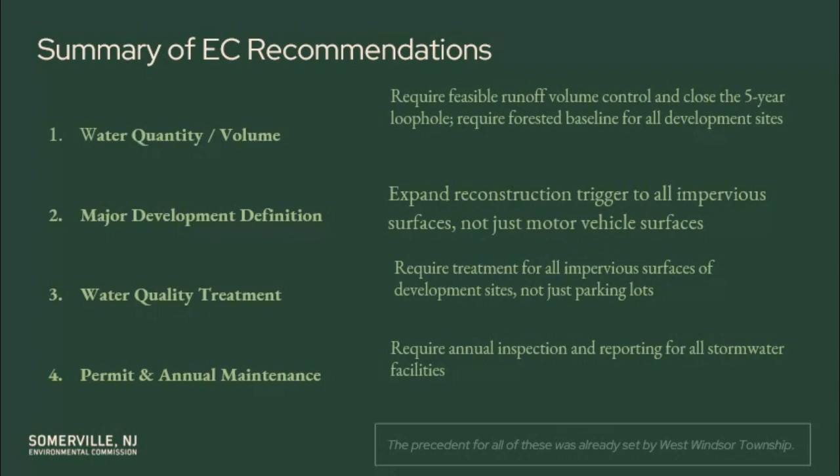So the first item I'm going to discuss is water quantity. And we will discuss the difference between water runoff rate versus water volume. The current ordinance that you are looking at, the current state minimums, I'm going to be referring to as the REAL Rules. And TWI is related to the Watershed Institute's enhancements, which we took our recommendations from. The REAL Rules, the current ordinance you're looking at, deals with rate but not volume, while the Watershed Institute's recommendations and our recommendations deal with both.

And that we make sure we baseline the peak runoff rate of water from a site as if the site were completely permeable. The REAL Rules does this, but only in conditions in which the site has been modified within the last 5 years. Most of our sites in Somerville that are going to be redeveloped have been sitting in the same condition, same hydrology for over 5 years.

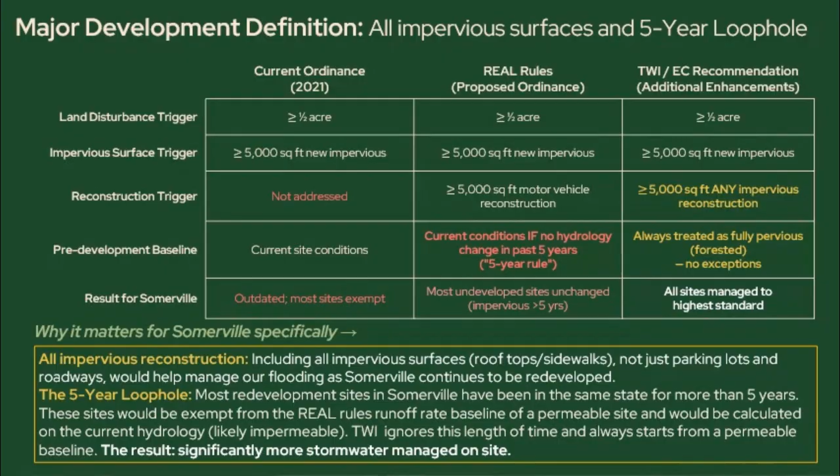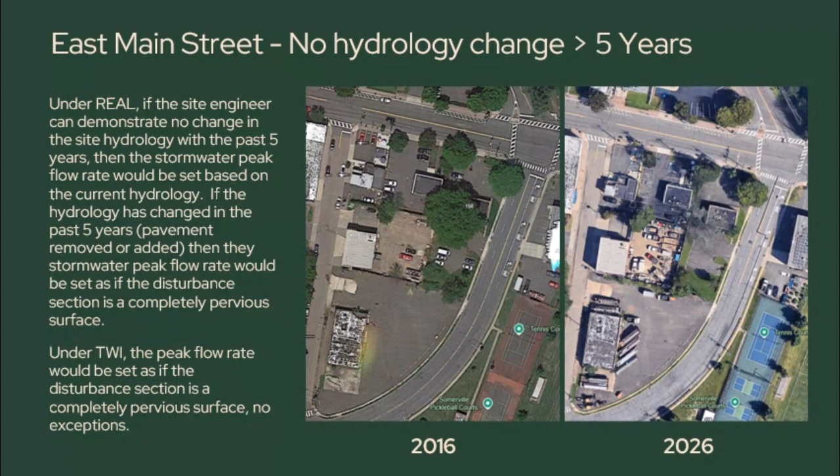Under the current ordinance, the peak rate would be baselined off of the current situation, since we're with a site that has no change over 5 years. So the peak rate for a 100-year storm would be set at 80% of the current hydrology. However, our recommendations would be baselined off of if the site was a permeable site. So the peak rate flow would be lower.

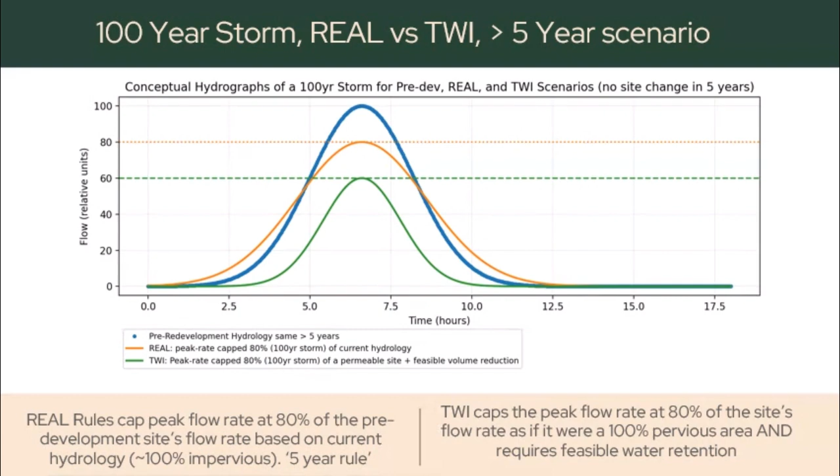Also, we're recommending that volume be controlled from the site. This would require feasible measures by the engineer to retain water on the site. As you can see, the shape of the orange graph is slightly different than the blue graph, even though the peak is less. And the green graph is lower and the shape is also different. So what does that mean for volume?

What this means is that the current site has a certain amount of water that comes off of it. Under the current ordinance you're looking at, with a site that has not been changed in 5 years, the same volume of water would come off that site. Under our recommendations, because we lower the peak rate and we address water retention and address water volume, the amount of water coming off of that site is going to be much less.

This means less water in our waterways. This means less water in our residents' basements and less water to destroy and harm our borough's infrastructure. This is how water volume can contribute, and peak flow rate doesn't necessarily deal with the overall problem.

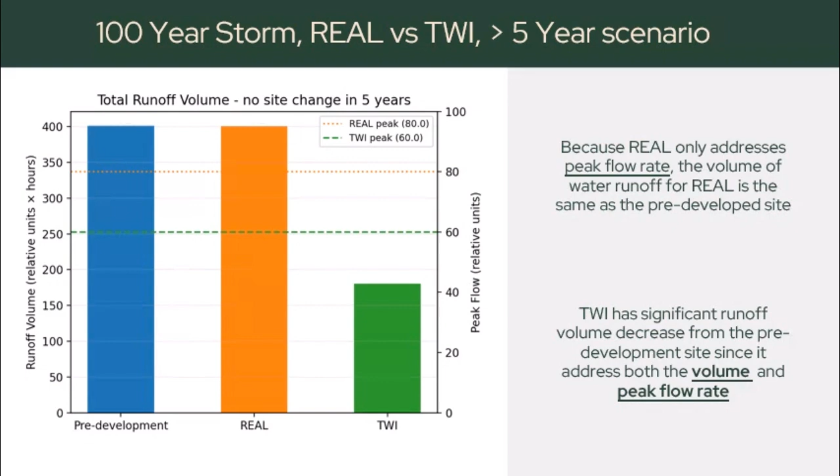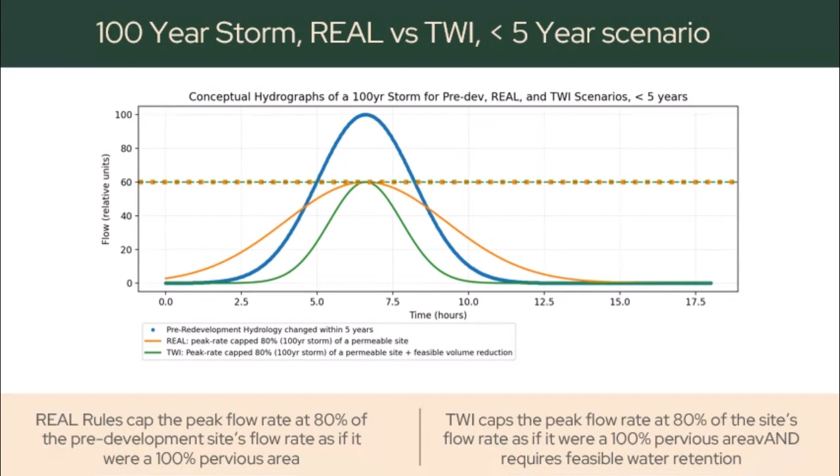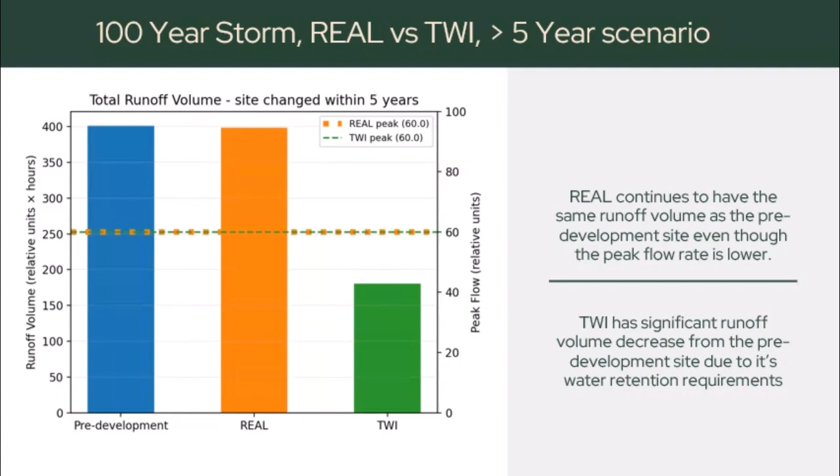So in conclusion, most sites in Somerville have not had their hydrology changed. The current ordinance you're looking at would make modest changes to the peak flow of the water, which would be a modest benefit to your current ordinance, but it is the state minimum.

Our recommendations ignore the timeline of the current site and also incorporate water retention to control the volume of water off that site. So what this results in is less water in our waterways, less water in our residents' basements, and less water to destroy and disrupt our town infrastructure and equipment.

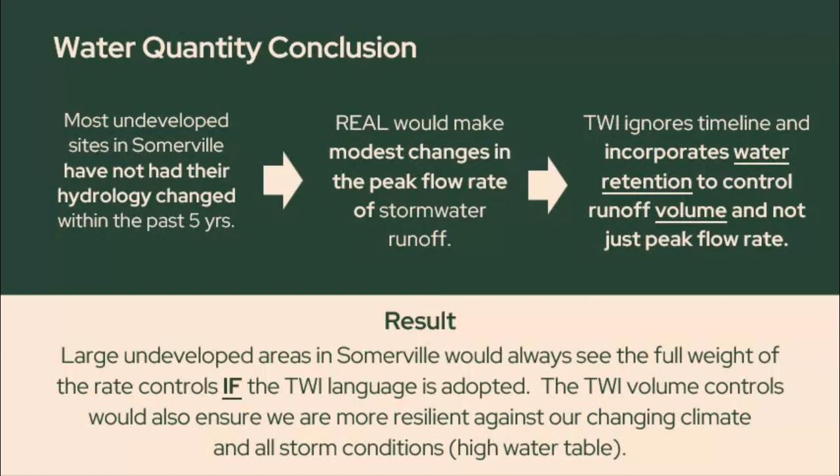So another way to explain this is I'll use a different analogy that maybe is helpful. Think about a bucket that has a specific size hole in the bottom, and you're having a storm. That bucket is filling up with water, and depending on the size of the hole, you're having a certain amount of water leaving that bucket at a certain rate. That size of the hole is going to change based on the current ordinance. It will be set to 80% of the pre-development site. So you're going to have a certain size hole.

All of that water is going to be moving off of an impermeable surface, if you consider the East Business District. And all of that water is going to eventually make it into our storm drains, into our stormwater management systems, and, like I said, into our rivers and streams. Even though it's flowing at a lower rate from the bucket than it would have been in the past, all of the water is going to get there.

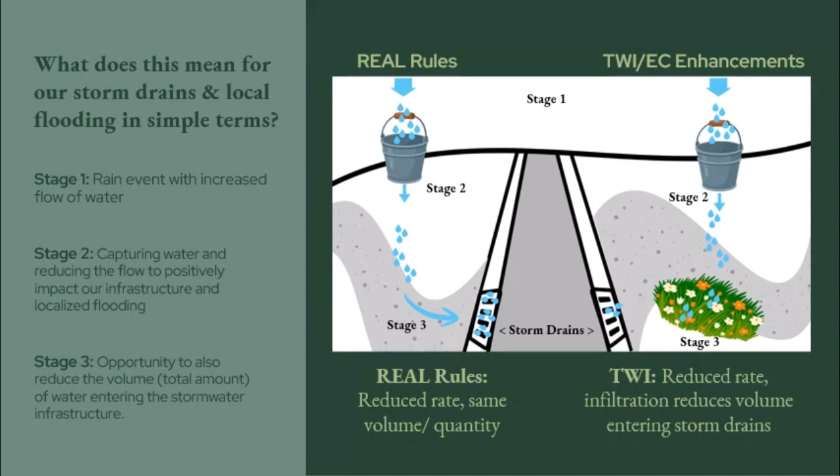If you consider our recommendations, the same size hole in the bucket, if you consider a scenario that's less than 5 years of disturbance, the same amount of water is leaving the bucket. However, you are retaining some of that water on site, and not as much water will reach our stormwater management systems, our storm drains, and our residents' basements and such. So I hope this analogy helps you understand that a little bit better.

The next recommendation we have is water quality. The REAL rules require a certain amount of suspended solids being removed or handled on motor vehicle ways, but other impervious surfaces are not addressed in the current ordinance you're looking at. Rooftops, plazas, loading areas, and sidewalks are not addressed. And I'd like to reiterate that most of the pollution that our waterways experience is from stormwater runoff.

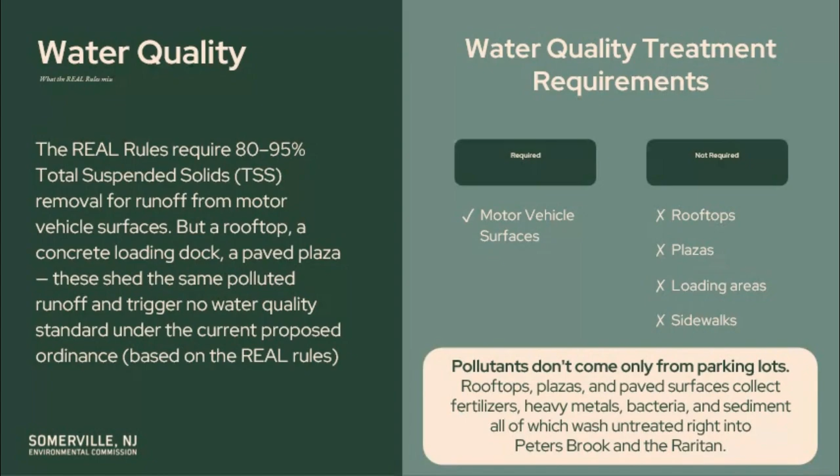So currently, every major development has a runoff gap. The rules require water quality treatment only for motor vehicle surfaces, parking lots, driveways, and roads, and none of these trigger any water quality standard no matter the size of the project.

So this runoff affects our infrastructure. Untreated rooftop and plaza runoff carries sediment, debris, and pollutants directly into Somerville's catch basins and storm drains, the same infrastructure that's already overwhelmed when it rains. The developer builds and then leaves. The borough maintains the system that receives everything they didn't treat. And so we close that gap.

The enhancements we're recommending would require water quality treatment for all impervious surfaces, no matter the project, and with no new thresholds. Just a requirement that a developer is already designing stormwater management into the site. Every hard surface gets treated, not just the parking lot. And you can look at West Windsor Township to get a better idea of how this might be implemented.

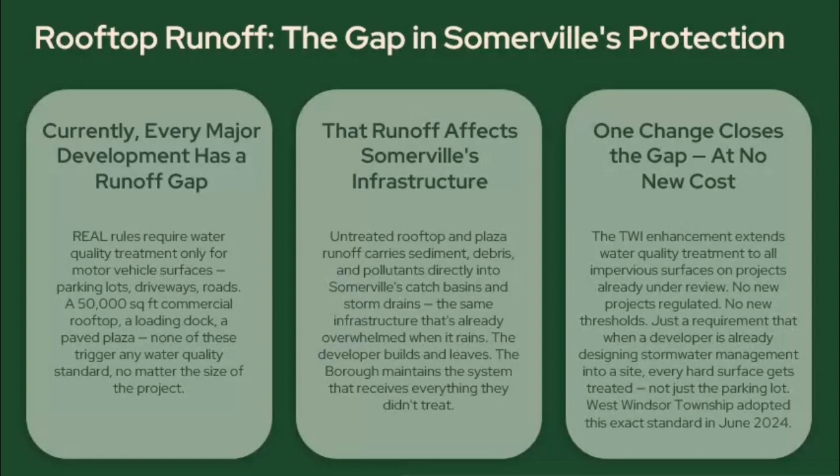The final recommendation we are going to be discussing is maintenance and permitting. So you can have great stormwater systems, you can have great green infrastructure that handles your stormwater runoff. You can implement stormwater runoff controls into a redevelopment site. However, they're only as good as they continue to be maintained. It's important to make sure that those systems work into the future.

And so currently in the ordinance you're looking at, there's no follow-up requirement after construction. There's no mechanism to verify that they're actually working, and the borough doesn't have record of the facility's performance. In our recommendations, we would require annual maintenance permitting, inspection, and a maintenance report, and the borough would maintain the documents for all the facility's performance.

And so this means a rain garden that's installed and never maintained is not stormwater infrastructure. It's a landscaping feature. And we think that annual permitting would create some accountability. Also, a clever note is that under FEMA's Community Rating System, stronger stormwater management programs can qualify Somerville residents for flood insurance premium discounts. So it actually could help the bottom line of our residents.

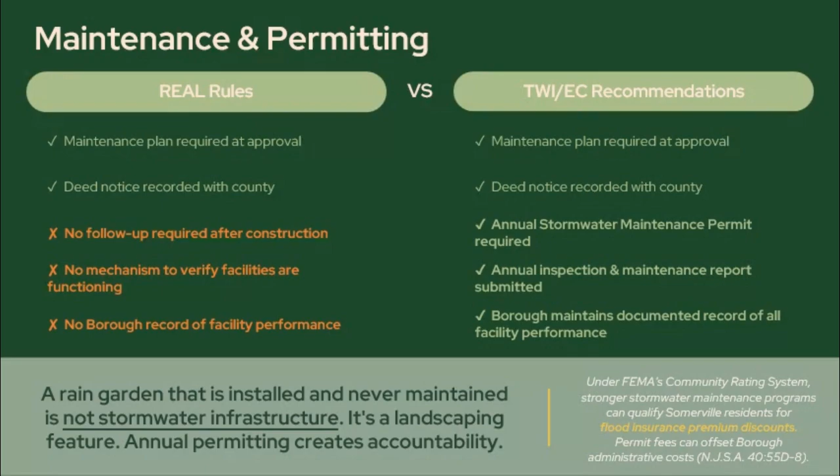So in conclusion, I'd like to also reiterate that all of these recommendations and amendments that we're offering are only based on major development and redevelopment. These are not based on minor development or anything that has any association with costs or burdens to homeowners.

So we discussed runoff volume control. We think it's important to deal with the volume of water leaving our redevelopment and major development sites so that we can decrease and better manage the increased rainfall into the future as the climate continues to change. And this means less water in people's basements, less water in our waterways, less water to destroy our town infrastructure. And we think closing that 5-year loophole would greatly affect the town's stormwater management, since most of the large sites in Somerville that are going to be redeveloped have not changed in the past 5 years.

New Jersey does not have many waterways that accept aquatic life. And stormwater is the major contributor to water quality in our waterways. We think it's important that we address this in this ordinance and require that all impervious surfaces that are being created would treat for water quality.

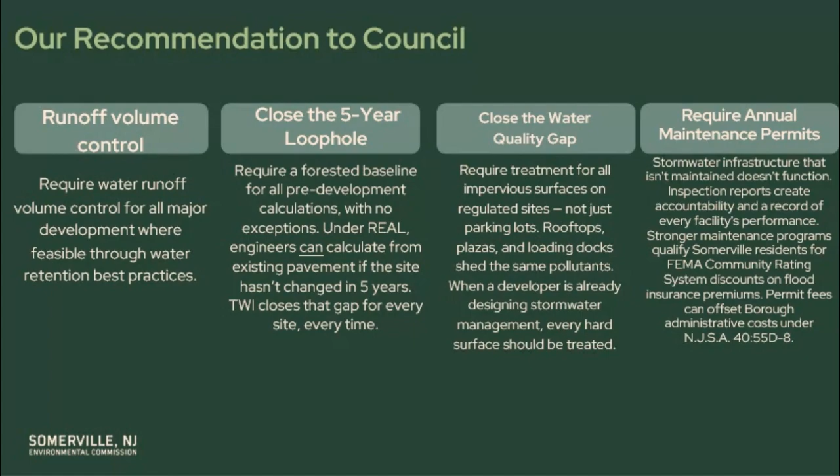So I understand that your primary concern here is cost to our homeowners. However, as I said before, none of these recommendations would increase cost to the homeowner because they only address major development and redevelopment. And I'd like to make the case that inaction on these additional amendments would actually do just that. Inaction would actually increase the cost to our homeowners and our borough as well. Inaction would result in the very thing you are trying to prevent.

Then again, these amendments would likely increase the cost to the corporations or individuals developing in Somerville or in our redevelopment areas. And I understand that this can make you nervous and hesitant to adopt such measures, since that is one of your chief concerns as you work to shape Somerville into an even more vibrant borough. But I think it is prudent of you to weigh the costs of not adopting these 4 amendments. We ask that you weigh the implications of increasing the cost to developers versus increasing the cost to our homeowners and our borough, as our climate will continue to make storms more problematic into the future.

Increased rainfall and stronger storms are going to result in damaged property in our residents' basements and damage to the borough's land and infrastructure. All of that costs money. So we simply ask you to consider the cost benefit of these amendments to the ordinance you are set to vote on.